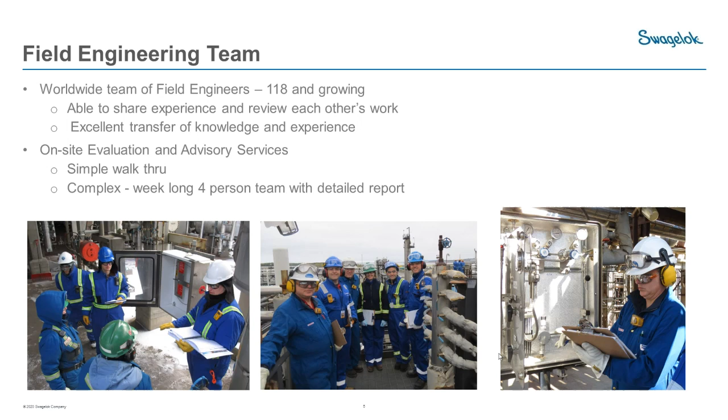So today we are talking about regulator basics. A few housekeeping things before we get started. Since we're doing this as a Teams live event, you do not have access to your microphone or your camera, so I cannot see or hear you. So if you have questions, please use the chat feature, and post those questions as we have the discussion. Jay will be fielding those questions. We'll address any that Jay could not answer at the end of the presentation.

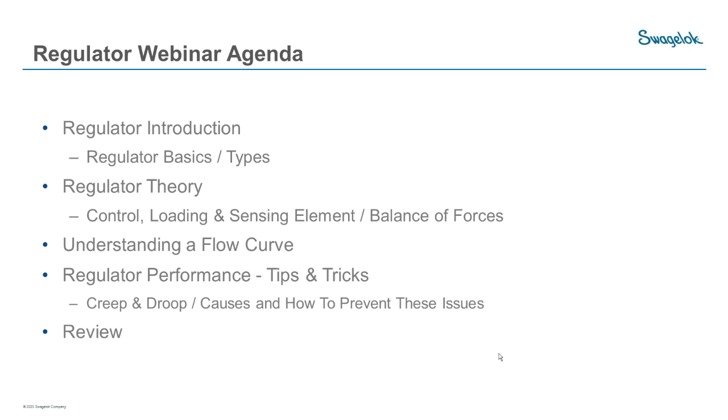So this is our agenda. We'll talk about the basics, then the theory of how it operates, then we'll look at the flow curves, and finally some performance tips and tricks on how to get the best out of our regulator.

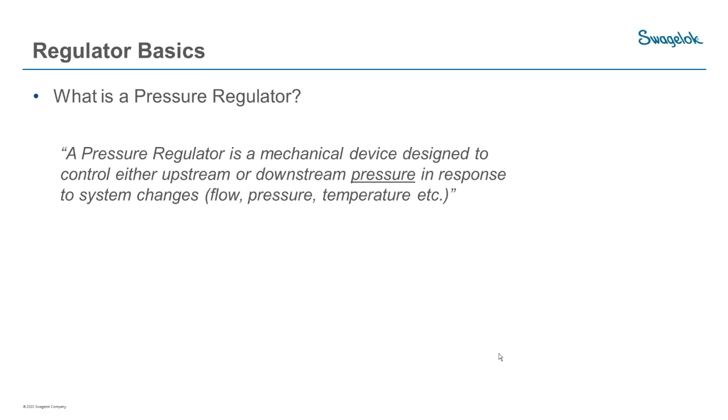So first of all, what is a pressure regulator? This may seem like a silly question, but it's important to formulate the rest of the presentation. A pressure regulator is a mechanical device designed to control either upstream or downstream pressure, in response to system changes such as flow, pressure, and temperature. This is really important: the regulator is intended to control pressure only. It's not a flow control device, it's not a temperature control device. You will see changes in flow based on the responses the regulator makes in order to maintain pressure. However, it's not controlling flow, it's controlling pressure. That's a really key difference.

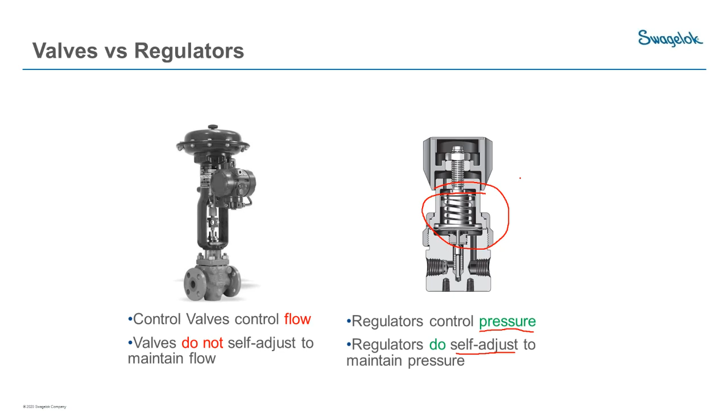To bring that home a little more, on the left here we have control valves. Control valves are for adjusting flow, not for adjusting pressure. They need some sort of external feedback in order to do their job, typically. Whereas regulators, on the other hand, do control pressure. What's really neat about a pressure regulator is that it's self-contained. It has its own internal feedback mechanism that allows it to adjust and maintain the pressure you want it to maintain. There are regulator setups that have external feedback, we're not talking about those today, but a regulator in its most basic form is just a nice little device.

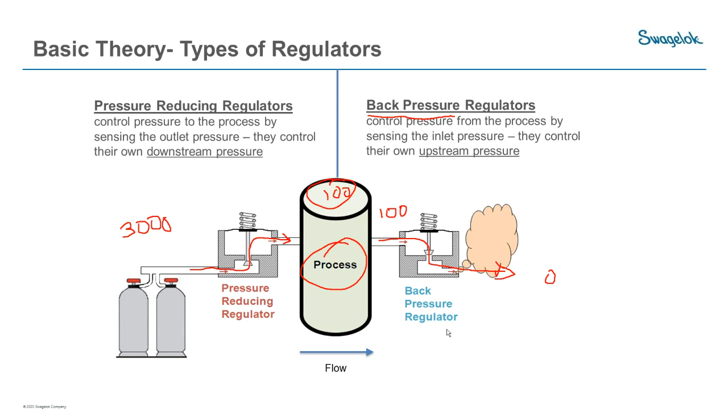So as this flow runs through to atmosphere, we maintain our 100 psi on this side and 0 psi on that side. A back pressure regulator, you could consider it to be a very precise relief valve. It's not a relief valve, but a similar sort of operation. The difference is that a back pressure regulator is really intended to flow all the time, not just during periods of overpressure that are unplanned for or not required in the system.

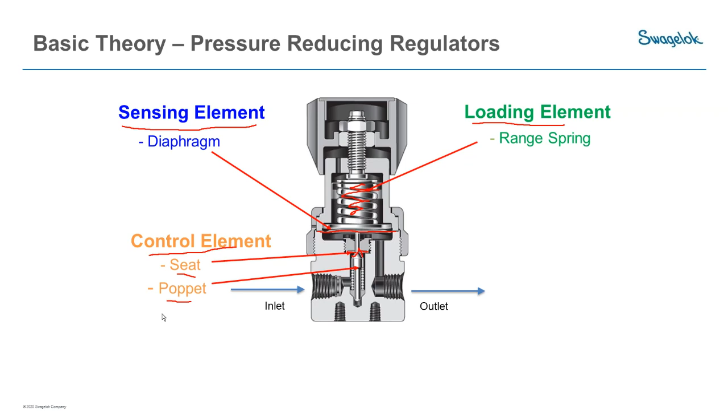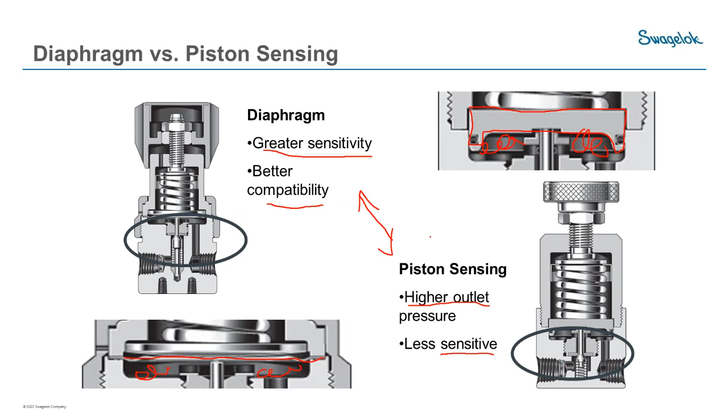As in any decision-making process, there are always trade-offs, and regulator selection is no different. The diaphragm regulator, especially with a metal diaphragm, you're going to get better compatibility because it's metal. Whereas with the piston sensing, you're going to have some elastomers involved, so you have elastomeric limitations. It's good to understand these differences, and it helps us select the correct regulator for the application. So if you have a high pressure, then you'll need to go to a piston. If you've got lower pressures, you typically want to default to a diaphragm type regulator.

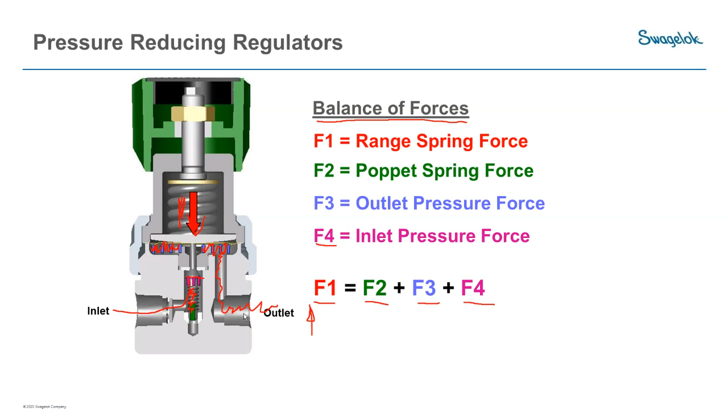So as our downstream pressure, as our flow increases, our downstream pressure is going to decrease, and our regulator responds by opening up to allow more flow and bring that pressure back up. That's how this control mechanism functions internally. So that's a forward-acting pressure-reducing regulator.

A similar sort of setup in a back pressure regulator. One thing that you'll see in this diagram that's different is we don't have a poppet in this particular regulator. Some back pressure regulators do have a poppet. In this case, the diaphragm is seating on this O-ring that's on the seat, so a nice simple design. Once again, we have a loading element, which is a spring in this case, though it could be a compressed gas. And then we have a seat.

Since this is a back pressure regulator, we are maintaining the pressure on the inlet side of the regulator. As that pressure rises and exceeds the setting that we have on this knob, the regulator will open up. This diaphragm will move up because we're overcoming the spring force, will allow some flow through it, and will consequently bring this pressure back down to the pressure that you want to maintain in your system. Once you're at that force balance, this regulator will again shut until the pressure increases again.

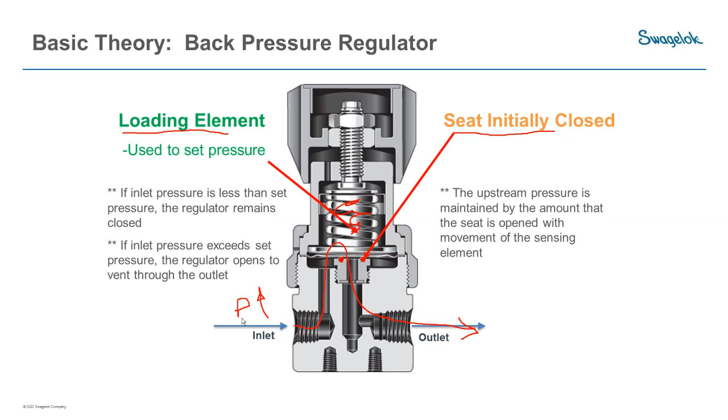So we have the same force balance equation for the back pressure regulator. Again, we're missing the poppet spring force, so we don't have that here in the equation. So we have our spring force, which we adjust with the knob. We have our outlet or inlet pressure force

working on the diaphragm coming from the inlet. And lastly, we have the outlet pressure force that's working on this area of the diaphragm, so coming from the outlet.

So once again, we have this force balance equation where our spring force will always equal the sum of these two forces, when operating as intended.

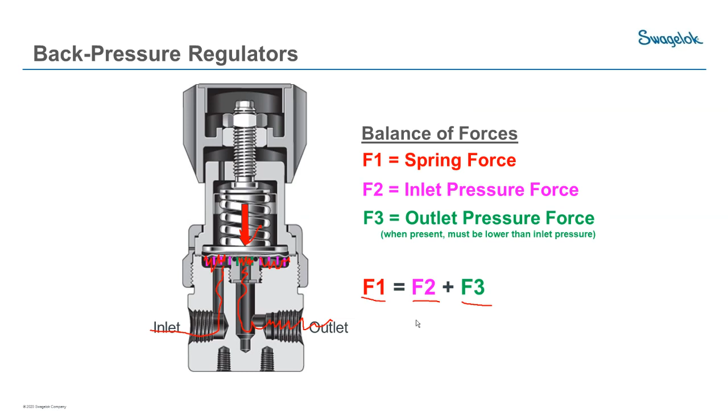One could make an argument that as this regulator sits here shut off, this force balance equation isn't necessarily taking place, but we really care about when the regulator is in operation.

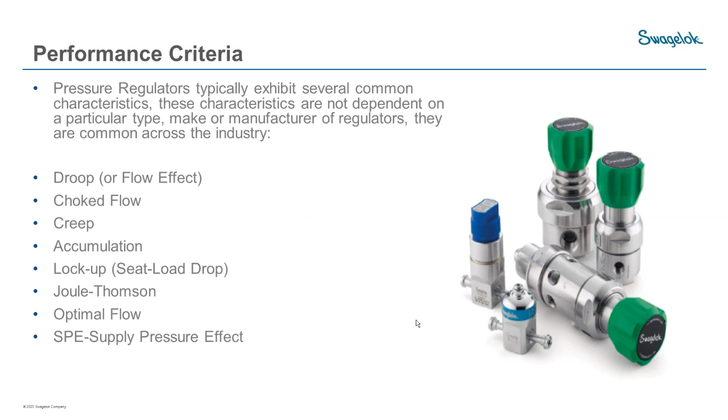So, performance criteria, we're going to talk about—I'm not going to read all these bullet points off, but we're going to talk about these as we move through the rest of the presentation, and give you a really good understanding of what's happening in a regulator.

So, the first thing we want to talk about is droop, or some manufacturers call this flow effect. What it is, as your flow increases through a pressure reducing regulator—this is increasing flow on the horizontal axis, and pressure on the vertical axis—as your flow increases, your pressure is going to decrease.

And there's a very good reason for that. As this regulator opens up more to accommodate more flow, this spring is going to get longer, right? The diaphragm is moving down, this poppet's moving down, the spring gets longer, so the force exerted by the spring is actually decreasing because we're lengthening that spring. That lengthening does have an effect on the setting, on that force balance equation we looked at.

And here's the effect right here on this curve. You see this pressure, as the flow increases, the pressure will decrease. You'll see here as well that there are two curves on this chart, for two inlet pressures. In this case, this upper curve has got a 500 psi inlet pressure. When you have a higher inlet pressure, you have less droop. Whereas with a lower inlet pressure, this same regulator's droop increases quite a bit.

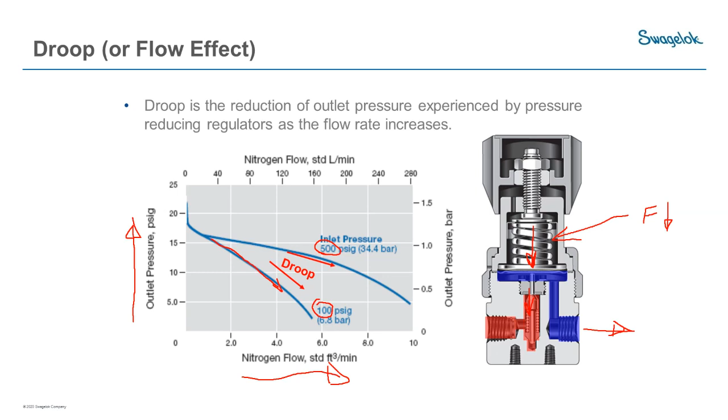So just a little bit more about droop here. Because droop is a fairly significant characteristic of a regulator, we do want to understand its effect on our process.

So, for example, this particular regulator—if we set our pressure at 60 SCFM, so if we draw a line straight up at 60 SCFM, and we set our pressure at this 65 psi, so we have steady state. We're flowing at 60 SCFM. We adjust our regulator handle, we get 65 psi showing on our outlet gauge.

Now, our process suddenly starts demanding more flow, so the process wants to now flow at 80 SCFM. Well, what happens is that now our pressure—that's not a straight line—has dropped to 59 psi. So we've dropped 6 psi for that flow change. Now that may or may not be acceptable for your process.

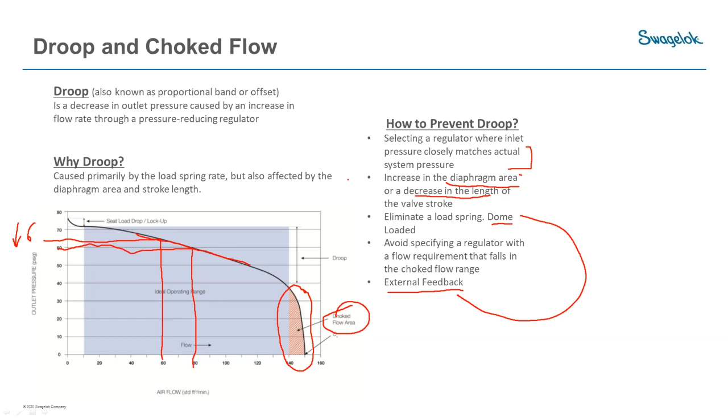So we talked about how the pressure of a regulator drops when the flow increases. Now we're going to talk about why the outlet pressure of a forward-acting regulator would increase over time. We call that creep, and creep is actually quite a scary thing.

When creep occurs, essentially what's happening is typically you'll have a situation where you have a valve on the outlet line of your regulator. That outlet line, for whatever reason, is shut off, and we no longer have flow possible through that line. When a regulator is new, we have a really nice clean seat and poppet, so it has really good ability to shut off flow.

However, as a regulator is in service, over time, debris will come down this line, and you will get debris collecting on the seat and poppet—that's what that debris looks like. As a consequence, what happens is now you no longer have a bubble tight seal inside this regulator.

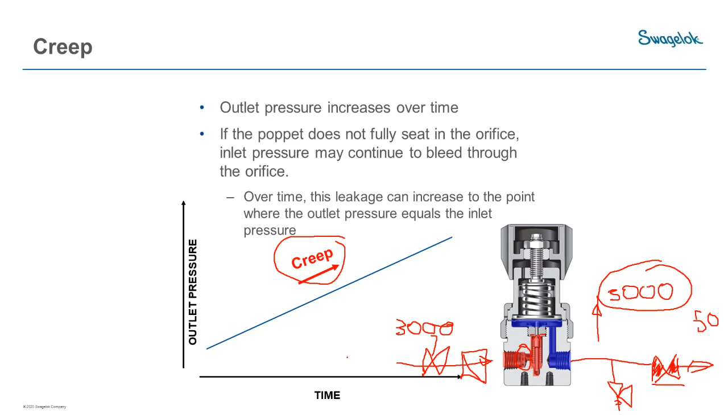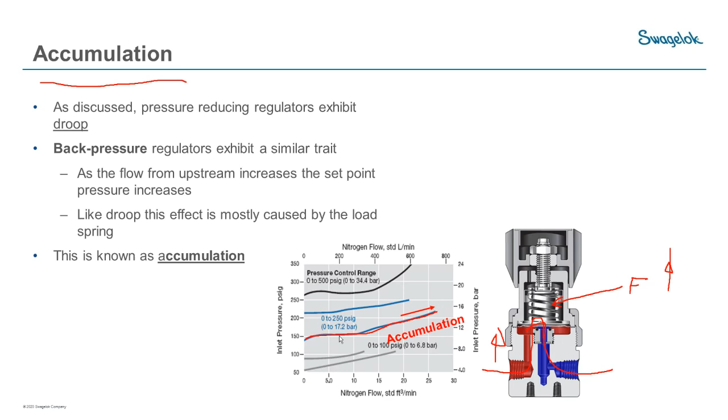So for back pressure regulators, as you're trying to flow more through here, you will see an increase in pressure on your inlet. So something to keep in mind, especially when you have a sensitive process where you don't want the pressure to build beyond a certain point—we want to make sure we're looking at that closely.

So the next thing we'll talk about is called lockup. We're going to talk about it with regard to forward acting regulators here.

The lockup is what happens when a regulator actually shuts off flow. It's easiest to explain by starting with a flowing regulator. So if we start with this regulator flowing at 4 SCFM, and we have a set pressure of 7.5 psi. So we have 4 SCFM showing on our flow meter, and 7.5 psi showing on our pressure gauge here. And that's always the way that we want to set our regulator outlet pressure: we start with our nominal flow rate flowing through the system, then we dial in our pressure.

So now we've got the system operating nicely, it's at 7.5 psi. For whatever reason now, we have a situation where this valve shuts off, and let's imagine that it shuts off gradually. So gradually we're following this curve up and over as the flow decreases until we get very close to zero, and then you get this spike up. Really what that is, is the final closing of the valve. You have your inlet pressure force and your poppet spring force finally setting that poppet up against the seat, and that's what that effect is.

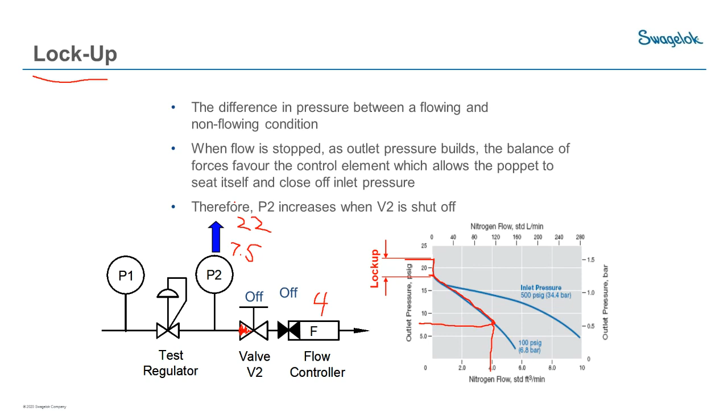It's not going to stop that regulator from functioning. However, if you were accumulating frozen materials inside the regulator or inside this outlet line, you would definitely be impacting how your system operates. So we do want to think about how we can compensate for this, and there's really two ways. We could preheat the gas - we could put a heat exchanger before the regulator to bring that temperature up to a point which, once we run the gas through the regulator, would balance out that heat loss effect.

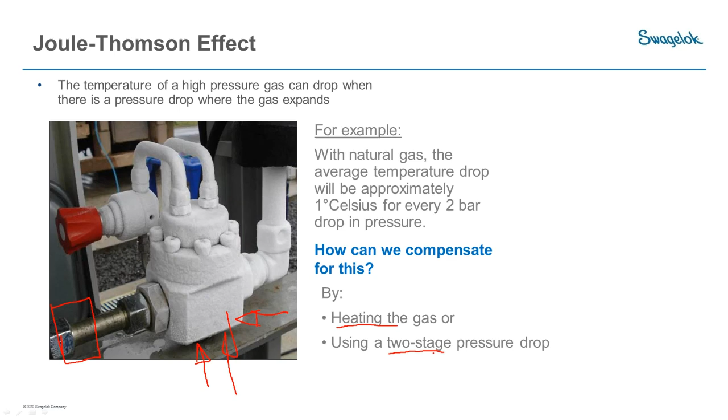Or we could use two-stage or even more multiple stages of pressure drop, because what that does is, as you add more stages of pressure drop, it allows the environmental heat to soak back into the system. So if you could take that pressure drop and divide it out, so you only have half as much cooling in each drop, you have twice as much ability for the environment to soak back into this regulator and give back heat. You could heat a regulator as well - that's another way of doing the job. But two-stage and multi-stage regulation is quite effective in a lot of cases.

So we want to talk about optimal flow range. At this point, we've talked about a number of different performance criteria of a regulator. Now we're going to bring all that together in this chart here. In manufacturer's literature, you are either going to see large tables of numbers, or you'll see graphs such as you have in front of you. This is the information that folks use in order to choose a pressure regulator.

So in our literature, we use graphs, and we find that it's just a little bit easier to absorb the information in a graph and to select through that. And what we want to do when we're looking at potential regulators is look at these curves.

We really want to avoid working in this lockup range. We want to avoid working in this choked flow range, over on the right. I want to really stay in this kind of nice flat center section of the curve.

Now you'll notice that this regulator at 2200 psi, we could use it over this wide range of flows. If we take that same regulator and only have 1000 psi on the inlet, now we only have the ability to use it for this range of flow, and really we can work up into this area over here. We really want to avoid this lockup tail. But you can see where inlet pressure has a huge effect on the amount of flow that you can put through a regulator.

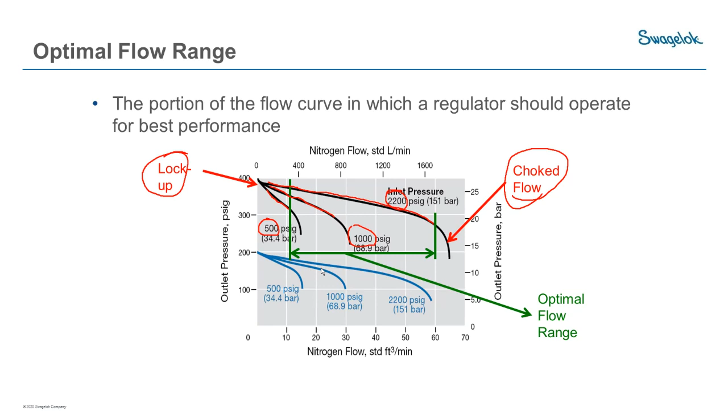So I want to get back into the math of a regulator and talk about supply pressure effect. We talked about the different forces in a forward acting regulator. When a regulator is in its steady state, when it's flowing and there's no flow or pressure changes going through a regulator, your spring forces F1 and F2 are essentially constant. So when that's the case, any changes in F3 and F4 need to be equal and opposite to each other.

So why that's important is we have this thing called supply pressure effect, where when our supply pressure changes, and typically our supply pressure, say on a compressed gas cylinder, it drops and then it'll pop back up and then drop as we change the cylinder out. Or an air compressor does the same sort of thing. Well, as that pressure goes up and down, as that supply pressure drops, there's this weird thing that happens where the outlet pressure increases, which is not intuitively obvious.

But if you have an air compressor that you're able to look at, if it has a gauge on the tank and a gauge on your regulator, you will notice that effect, that as the tank pressure increases, that the outlet pressure of the regulator decreases.

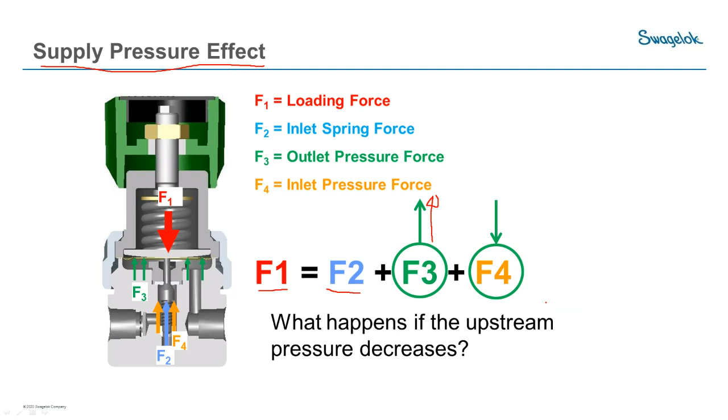Now, why is that important? Well, it's important because it can have a very large effect on your outlet pressure. If you're starting with 3,600 psi in and you're at 50 psi out, there can be a significant effect on that 50 psi if we don't do something to mitigate that effect.

And a really nice mitigation is a two-stage regulator, which is what this regulator in front of you is. I'll explain why that is in these slides here.

So here we have that two-stage regulator represented by two individual regulators. It's essentially the same thing, they're just not built together. We're starting at 3,600 psi. This regulator, for this example, has a 1% supply pressure effect. That means that for every 100 psi of change on the inlet, you'll see 1 psi on the outlet.

As we use our compressed gas cylinder from 3,600 psi down 2,000 psi, or down to 1,600 psi, since we're losing 2,000 psi, 1% of 2,000 is 20. That means that our pressure on this side goes up by 20 psi. So, yeah, if we were set at 50 psi here, that'd be a pretty significant change from 50 to 70 psi.

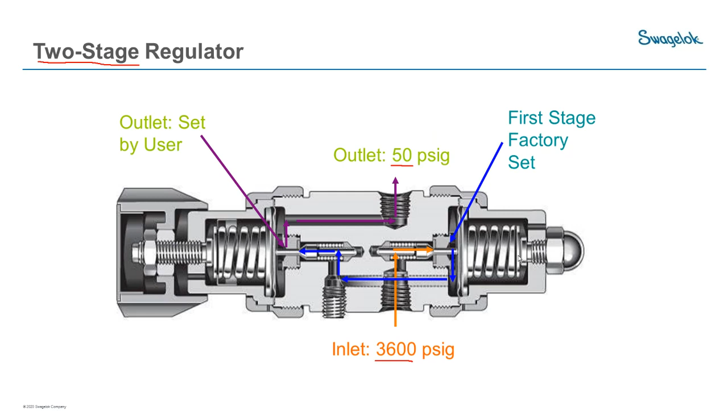So that's the magic of two-stage regulation, and why you want to use that with compressed gas cylinders. And that is why products like this exist, where it has two regulators built into one, and you have the ability to set your outlet pressure, and the factory sets that first stage pressure cut to whatever makes sense. So as our example, this example is 500 psi.

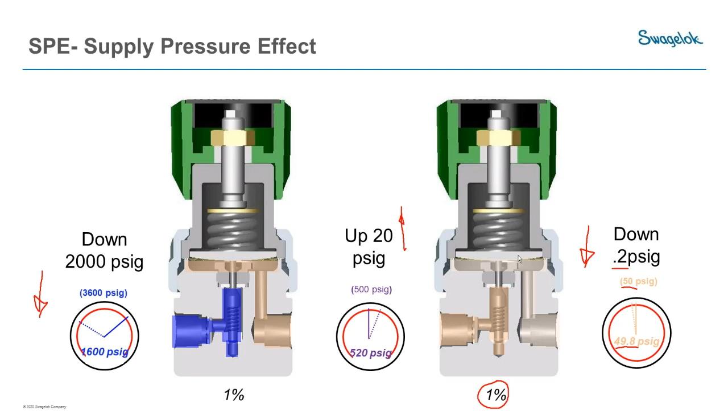So that's supply pressure effect, and that can have a significant effect on your analyzer or your application, if you're running off compressed gas cylinders. So the last thing that I want to talk about today is venting options.

I'm going to start by talking about the area inside this cap here. The area inside the spring cap needs to be vented, because it's a working area. Typically, you're either going to have a vent hole underneath your cap, or you might have a threaded fitting into the side. We'll talk a little bit more about those differences in a moment.

The other important thing to know about venting is that some regulators have the ability to what's called self-vent. Within the diaphragm mechanism, there is the ability to vent a small amount of excess pressure from the outlet side of the regulator. This is really intended simply for adjustment purposes.

So when you're adjusting your pressure, you can turn your handle counterclockwise until you hear the pressure relieving, then dial your handle back in clockwise and achieve your lower set pressure. That's really the intent of this mechanism. It's not intended to be a relief valve or a safety device. It has no rating for flow. So if you're concerned about creep on the outlet of your regulator, this is not a mitigation for that.

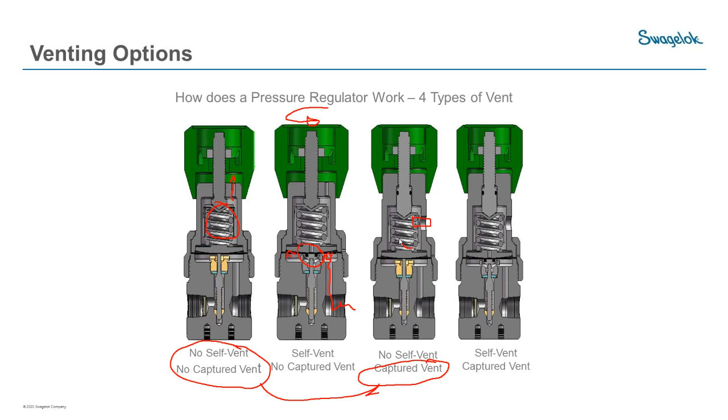That could be a concern if you're dealing with something that's highly toxic or pyrophoric, and you want to have some mitigation in case there was a failure in this diaphragm. So what you could do is have a captured vent on the no self vent option, which removes this hole and replaces it with the NPT thread and seals the stem to the cap. Now if something were to happen, anything inside this cavity, you could send it to a safe place.

The next thing we want to talk about is the self-vented options, and we have the same sort of capturing options. In this case, we have no captured vent, just vents from underneath the handle, whereas this self-vent option has a captured vent. Same thing is that if it does self-vent, it's going to be connected to a system where you could manage that vented gas. So those are the venting options that we have.

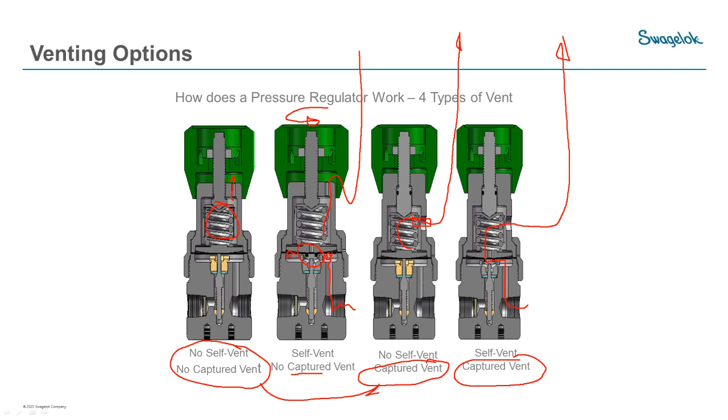Really brief review: we talked about the fact that regulators are for controlling pressure, not for flow. One important thing I want to point out is that regulators are not intended to be a shutoff device. When they're brand new, will they shut off? Sure, but they're really not intended to be used that way. They're a dynamic device that really requires that it be flowing. It's not intended to shut off for long periods of time.

We talked about the two types of pressure regulators, forward and back. We talked about the different elements within the regulator, and we looked at the flow curves and regulator performance.

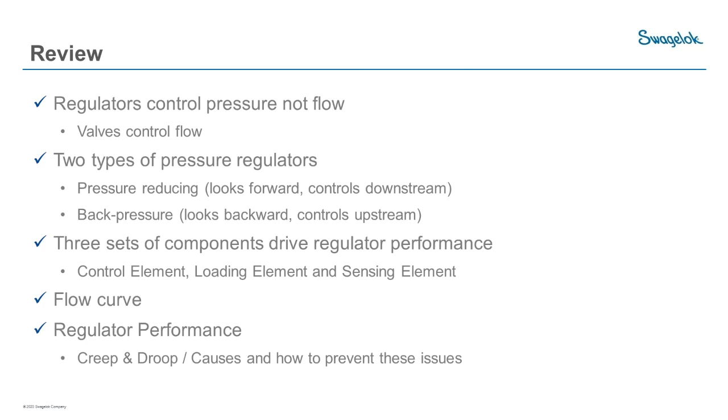Are there any questions that have come through, Jay? Yeah, there were a few, Rich. I handled most of them in the chat, but if you want to elaborate on any of them, feel free. I don't know, can you see the chat at all, or shall I read them to you? If you could read them, then that would help everybody, I think.

Sure. So the first one was, what materials are the regulators available in? I described our common offerings of stainless steel and some of the alternative materials that were available with the K-Series product line.

Definitely our literature has got some really good information there, and if you have very stringent requirements, please give us a call. We can work through that with you and do some material compatibility checks as well.

The next one was optional O-rings for the regulators. I highlighted the standard FKM that's available in most products, and then Kalrez kind of being an option for more aggressive media with the K series.

Again, when there are applications that we need to have a closer look at, let us help have that conversation with you. Next one was spring load versus gas or dome load. So you spoke to that, but anything you want to add, feel free.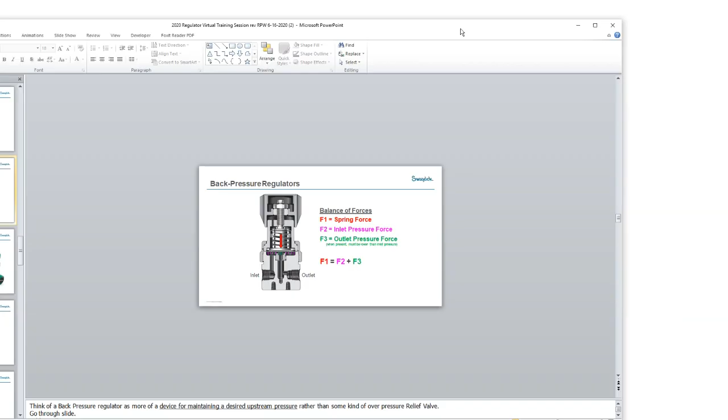And will that work? Oh, all right. Well, that's not working for me. Let's do it this way. All right.

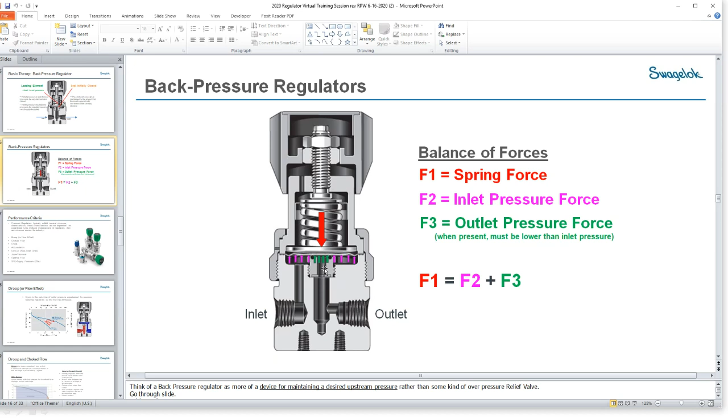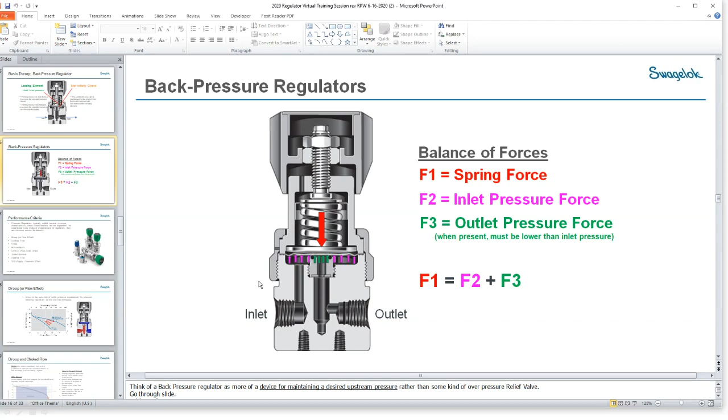In this particular image, you see where the diaphragm is actually acting directly on this O-ring. What some back pressure regulators will have is that rather than having the seat directly underneath the diaphragm, the seat would move further down in the body, and then you would have a poppet attached to the diaphragm, or working up against the diaphragm with a spring and working into a seat. So much like the pressure reducing regulator that works up against the seat this way, you'd really just flip this poppet and seat mechanism around and have it working in the opposite direction.

And really, it comes down to, why would you do it that way? It really is, as you get to larger flows and want more control over your flow, that's when you're going to end up with a poppet style back pressure regulator.

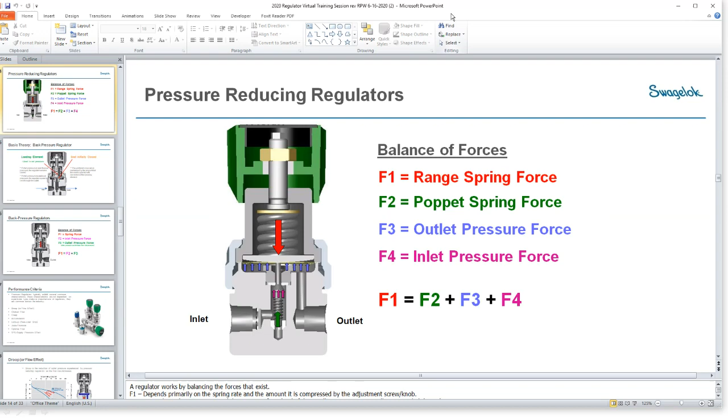So then one just came in: what's the difference between flow and pressure? Well, really the difference is this: they're tied together. So when you have your process, in fact, if we go back to our first slide here...

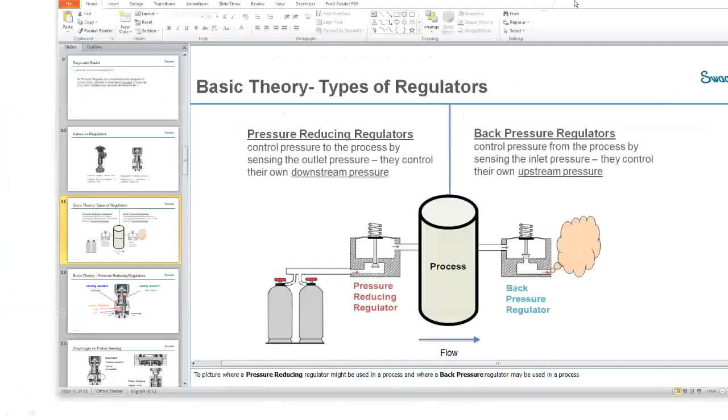Let's see, this will aid in the discussion. So with your process and regulation, you want to maintain your pressure within the process. You want to supply it with pressure, and you want to also maintain that pressure as it leaves the process. And the process is going to require a certain amount of flow.

So the relationship really is process dependent. The regulator is responding to what your process requires. The flow through the process is determined by the process. So more than likely you will have some sort of consumption going on, and you'll likely have a control valve in here that's opening and closing, controlling flow—that's really where your flow control is coming from.

The regulator really is simply going to respond to those changes in the process. So when the process demands more flow, the regulator is going to provide more flow and attempt to maintain that pressure. And vice versa, as the process demands less flow, your regulator will close down and provide less flow in order to maintain that pressure on the outlet.

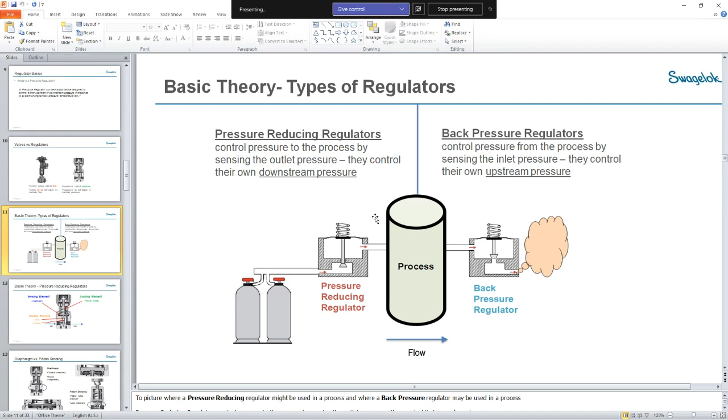I hope that answers the question. If it doesn't, then please get in touch with us and we can have a little bit more of a discussion.

Excellent, Rich. And the last one that just came in was, do you keep regulators in stock, and what about gas fittings?

Okay, so we do have some regulators in stock, but generally, in a lot of cases, because there are so many different pressure ranges and requirements, we tend to fill those on order. So if there is a requirement or something that you typically would want us to stock, give us that feedback and we'll make sure that we have that particular item in stock.

And gas fittings? Okay, similar with gas fittings—there are some that we have, but typically there are so many different gas fittings that we do typically source our gas fittings either from Western Enterprises or from Matheson. So again, we can address those specific requirements as they come up. It's better to ask early to make sure that we do have what you require. So our stock is not vast, but we do have a few things.